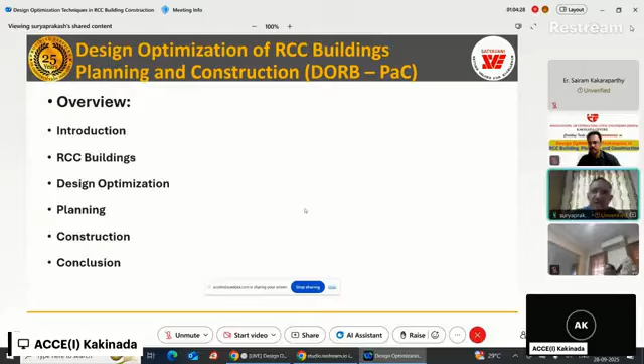Construction demand for buildings, as we all know, is growing rapidly. In Hyderabad alone, about 5 years back there were 2 lakh flats to be constructed in a year by builders; today it has grown to 5 lakh flats a year. Coming to our projects, the size has grown too - earlier a 1 lakh square feet apartment building was a very big one, about 15-20 years back. But today, 4 million, 6 million, even 20 million square feet are typical project sizes we are handling. That itself talks about construction demand for buildings.

So we, the consultants and engineers, have to brace up to meet this demand. At the same time, the demand for cost optimization is also growing because of the paucity of resources, and we have to optimize resources and introduce technology advancements to achieve timely completion.

In fact, we had to complete a project of 3 million square feet in 12 months, an 11 floor project, delivered at 180 rupees per square foot. We've delivered such projects, and I'll be sharing some of my experiences from them.

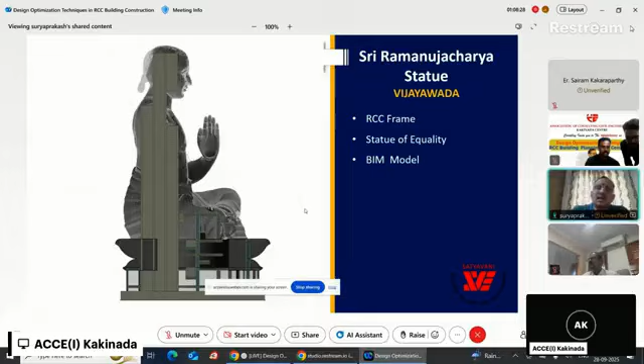This is just one of the complex projects that we have designed - Ramanujacharya's statue in Vijayawada. It's not yet constructed, but we have designed this as a concrete structure. What is available in Hyderabad now is a bronze and brass cladded statue with a steel structure. We have analyzed and designed this as a concrete structure using the BIM model.

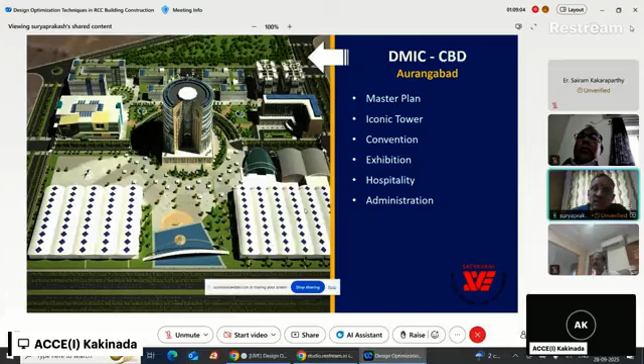I'm just showing this as an introduction to show what kind of demands we have from the clients to deliver with quality and economy. So coming on to the core of the topic, for any design to be perfect, to be optimized, investigation is the most important thing, as we all know.

And it starts with the topographic survey; it's not a geometric survey or just a survey. In many projects I come across survey drawings supplied by the client where a lot of information is missing. So we have to encourage our fellow consultants to conduct this topographic survey with all the details, including, if possible, charted utilities on the ground. And above ground also, the transmission lines or distribution lines, water supply pipelines, all the details, not only in our site but the surroundings, because it affects the design.

And when it comes to larger projects, geological survey is also very important. Particularly, we have seen the problems of earthquakes because of lack of proper geological survey or interpretation of the geological survey. Next is the geotechnical investigation. It's not a soil investigation. It is a geotechnical investigation.

We have to ask for, and we should also follow, the code guidelines for the extent of the geotechnical investigation, the number of boreholes required and the type of tests to be done on the samples. Because without this data, we will be doing the design, but after the design submissions some changes will be required from the actual site condition. So it is better we have proper investigation so that there are no changes during execution of the project.

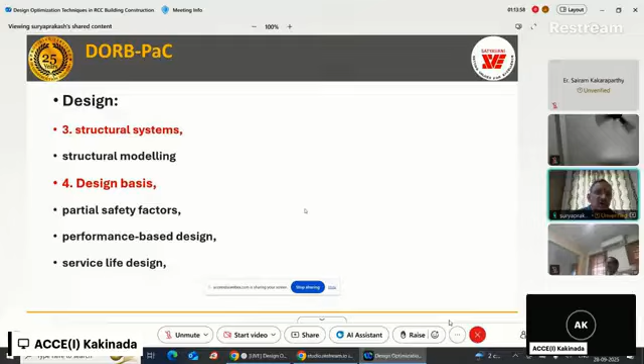Next, coming to the design, the reliability studies in view of climate change affecting loads. This is very, very important. We all know the K1 factor in our IS 875, which depends on the return period or probability of peak wind happening in the life of the structure. Now we are seeing the rainfall this year. And you must know that the rainfall intensity and the periodicity of rainfall has increased almost fivefold.

What I am saying is, in the last 100 years, 1901 to 2000, we had 5 peaks of 100-year rainfall. And in the last 25 years, we had 6 peaks of 100-year rainfall. Similarly, wind speeds we have experienced in 96 and 2000 in the coastal areas. Also, in the last 2 decades, 2 incidents of wind speeds exceeding our 100-year peaks. So this is a very, very important thing for engineers to incorporate for important structures, particularly the reliability study and proper reliability coefficient when we are designing.

And next is the temperatures rising, and the flooding happening yesterday in Hyderabad after 30 years. The central bus station CBS is flooded by the Musi flood. Of course, multiple reasons, not only the rainfall, but we have to, as engineers, take into consideration the highest flood levels of 100 years and design the buildings and facilities.

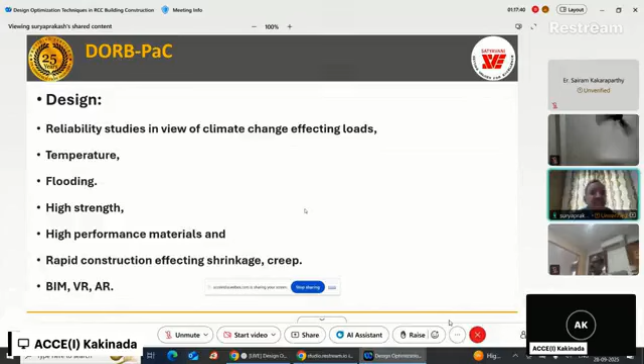It's not just the architectural plan, and we should not accept an architectural plan as it comes before we do the coordination with all the services and the structural requirements. So we as engineers have to study this interface of all the services and get the drawing finalized. Only then should we start the design. Otherwise, whatever optimum design we carry out will be subjected to revision.

Now, the core of the topic, RCC buildings we are talking about. So, what kind of RCC buildings? And when we use RCC, we have to come out of the thinking that if we go for high-rise, we must use pre-stressed or post-tension or compulsorily use these technologies. Not necessarily. If you see the Burj Khalifa design, the tallest building, it is only an RCC building. No high technology elements or materials, but definitely the best quality materials used in reinforced concrete and the most optimum structural system that was adopted.

So it's very important as consultants for us to arrive at the optimum design. Think of the total built-up area requirement, number of floors to be constructed, and whether basements are required or not. Nowadays, thanks to NBC, we are seeing basements are not necessarily to be provided unless they are economical. I propose basements only in soils where the top 10 meters is very poor soil. Then I utilize replacing the soil with the basement.

Otherwise, in a Hyderabad kind of scenario, where we have soft disintegrated rock or hard rock, we are proposing parking floors above ground only. And that will definitely be economical compared to cutting the rock, in terms of time and cost also. And next is type of structures, whether it is a residential building, commercial building, or office building. Nowadays, when we talk about the optimum spans we are adopting, from my experience, I'm sharing, the span is decided based on the number of car parks required. This is a very, very important point to be noted.

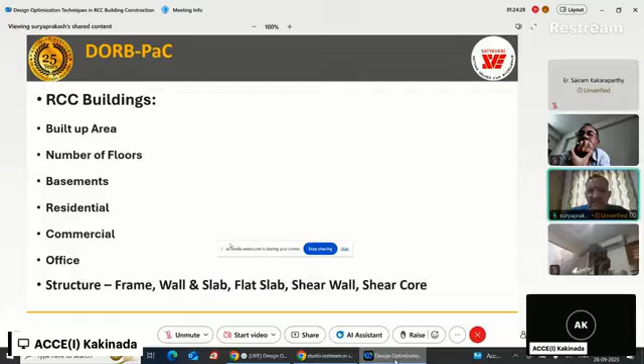And next is the flat slab. Flat slabs we use in commercial and residential buildings. I'll share some of the experience. And of course, we have shear wall. We use the term shear wall when we have the framed structure reinforced with shear walls for high-rise construction above 10 floors and up to 20 or 30 floors.

Next is the shear core. Shear core happens naturally in the planning because of the service cores like lift or staircase, where we use the shear walls combined as rigid monolithic, and it becomes a shear core, very advantageous in terms of constructability and speed of construction also. I'll show some of the pictures for that as we move forward.

Next is the planning. I already touched upon planning a little bit, but statutory requirements, bylaws, particularly in Andhra Pradesh now, a lot of amendments have taken place in the bylaws. So we have to be very thorough with those bylaws. Why I'm talking about it is most of these things come on us, because though we are the engineering consultant, the client depends on engineers, because most of the time we are connected with the project. Architects, once the approvals are in place, are not so much connected as we engineers.

So we have to be thorough, particularly about NBC provisions, fire safety norms, water supply, waste management, and not only structure actually, we have to be thorough with all these aspects when we talk about the permission. And timely completion is the most important thing. When we are planning itself, we have to consider the time of completion of the project and start considering the structural system and design methodology, considering this.

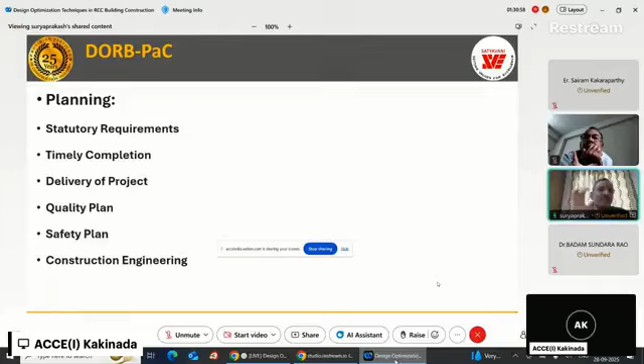I'm just sharing as a fellow consultant my experience with my clients, so that it helps you in dealing with the clients. Definitely 2 rupees per square feet or 5 rupees per square feet will not be sufficient to work as a consultant. So we should move to that.

Next is the construction. Many advancements in construction, concrete types and curing compounds. We know curing methods: we have steam curing, we have heating heads, we have curing compounds, all these methods, and block work. Earlier, we were only dealing with the clay brick, but now we have block work. We have cement blocks, hollow blocks, terracotta blocks, AAC blocks, CLC blocks, all these, and different sizes.

And I want to tell you and insist that please don't leave block work to the mason. Masonry is not mason's business; masonry also is engineer's work, actually. So we have to engineer the masonry also. I have come across brick walls collapsing, actually. So we have to take care of that and consider construction method and time while deciding the block work and size of block and weight of block.

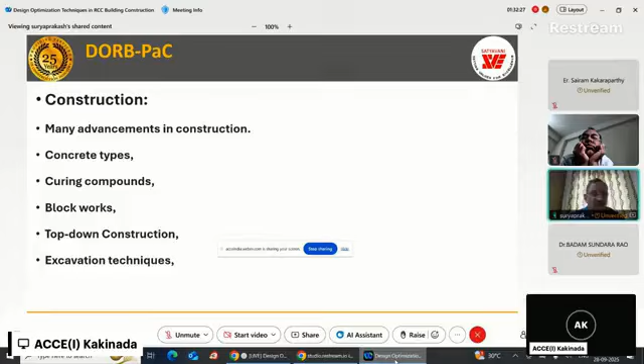Next is the method of top-down construction. Nowadays we have this. I will not go deep into that, though we have given a proposal for one of the projects including top-down construction. And excavation techniques: what method of excavation we follow in the project should be considered.

Next is the deep foundations like piling. In Andhra Pradesh particularly, we have the longest coastline, and we need to go for deep foundations, particularly piles, precast piles. We have driven piles, bored cast in situ piles, jetty piles, all this. And also we can use micro piles, particularly for retrofitting existing buildings. Micro piles will come very handy, and micro piles can be used for small projects, actually.

It is very advantageous, like 6-inch dia with a 32 dia rod, single pile, of depth about 6 meters, 7 meters for a small building. We need not necessarily go for under-reamed piles, and we have done strip foundations on under-reamed piles in AP in clay soils. So that is another optimum design we have done.

And 2D and 3D precast construction is also gaining ground. In fact, I worked out the feasibility of 3D modular in East Godavari, because I'm talking to Kakinada engineers. We have even worked out on that. And rigid monolithic construction, that is Mivan or shear wall, which is popularly known, and post tensioning and monostrand.

Monostrand we have already used in one of the residential projects where the builder wanted 6 meter by 8 meter as a single flat without beams, without columns in between, to improve the speed of construction. In fact, post tensioning is not economical for a 6 meter span, but for speedier construction, lesser cost and lesser slab thickness, we had to go for post tensioning. But for the first time we used monostrand and brought down the slab thickness to 150.

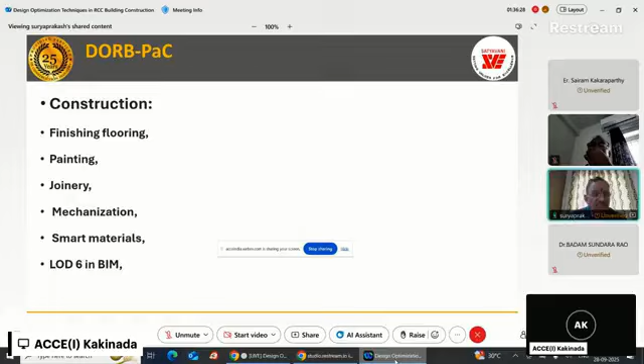In fact, in 2007 I talked about this, that the future will be mechanization in construction, and now we are experiencing no project without mechanization in material handling, material transportation, labor transportation, or even the total execution of the project. So LOD 6 in BIM will help us in planning the construction. Next is the building facade, plumbing, building automation, electrical, water supply.

I will not go in detail, but we have to consider all these aspects when we talk about optimum design of the structures, whether it is loading aspects or clearances, ducts, requirement of ducts particularly for fire, and nowadays for waste also, garbage chutes and all that. So water supply ducts, electrical ducts, building automation, everything we have to consider.

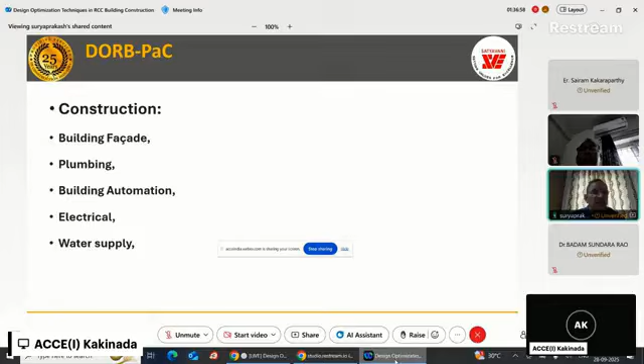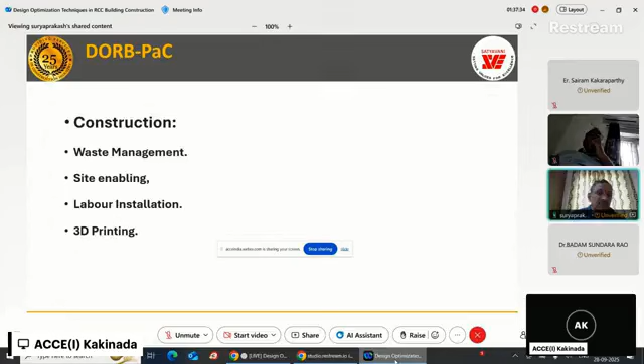Next is waste management, as I said, site enabling. Nowadays our planning we are modifying for facilitating construction also. This is very important because construction cost is a major thing, and if we don't make the movement of material efficient, then the cost will go up. And labor installation, what we call labor accommodation, and now the latest technology of 3D printing - we have to think of this for optimum design, planning and construction in future.

This is BIM 7D. I was talking about LOD 6 for construction, and now 7 is for facility management. That is post-occupancy future. It is going to be necessary for us.

Thank you. So structural system should be finalized through study of plan, drawing and construction system. For the interest of our friends, I did one project with BTech students in Hyderabad - what is the optimum span in an RCC building frame of stilt plus 5 floors? This is the question, and we did the real study, parametric study, of the column beam slab system.

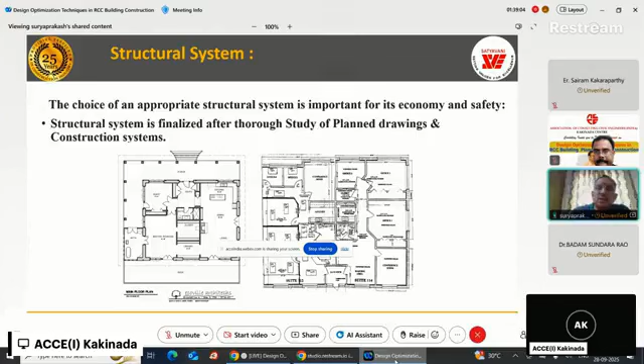And we found that 3.6 meter is the optimum span - 3.6 by 4, 3.6 by 5 can be optimum. So we have to see that we bring down the span to 3.6 by considering the plan and propose the framing to the planners, whoever is planning. So the framing system that we select should be suited to the building plan, and the selection of structural system is to be finalized with respect to cost, time, buildability, and functionality of the structure.

I'm only telling what I have implemented. I'm not telling theory actually. I'll explain.

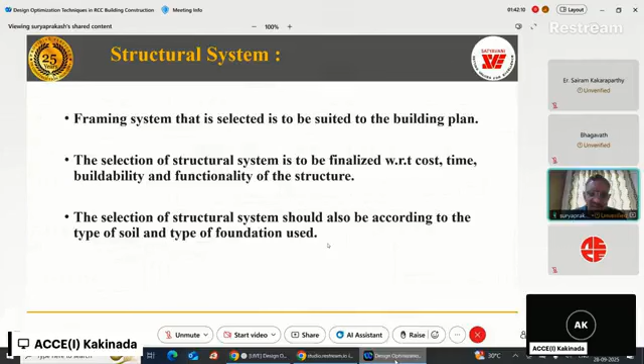Okay, thank you. So the selection of structural system should also be according to the type of soil and type of foundation used. Because as I said, the foundation, whether it is pile foundation or raft foundation or the piled raft or even the annular raft or strip footings, all will determine our structural system also, overall cost when we consider. Next is load bearing and ribbed floor, RCC slab, column slab beam, framed diaphragms, and then column plate or flat slab system plate.

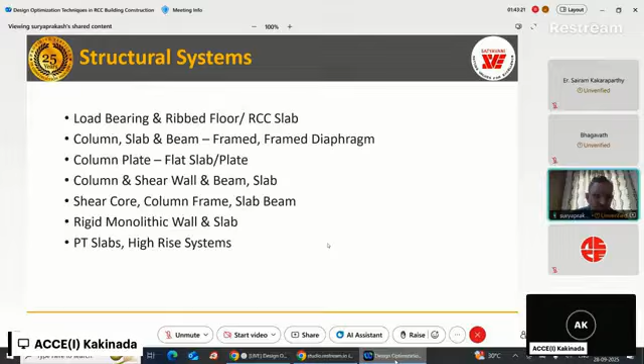So load bearing is a simple thing. This is a load bearing infilled frame, I would say, which is good for seismic resistance also. And this is just a wall and slab, load bearing wall and slab system, which is still good actually, which is still economical, except for time and quality and availability of materials.

IS 1905 is the masonry code. There are two codes for masonry. We have to use these codes, and of course these codes require revision. So let's not forget that masonry wall also requires proper design, structural stability for the masonry wall also.

A flat plate floor system - in fact, I have done a project in UK where the floor height is 2.7 meters.

Because of the heating requirement, if you reduce the volume, it is really very economical. So how can you bring down the floor height to 2.7? There, strictly adopt flat plate only, no beams at all, no structural wall, only column and flat plate. Of course, it is possible in Britain, UK, because the earthquake is not very critical. In our country, earthquake is critical, so we have to be careful when adopting this.

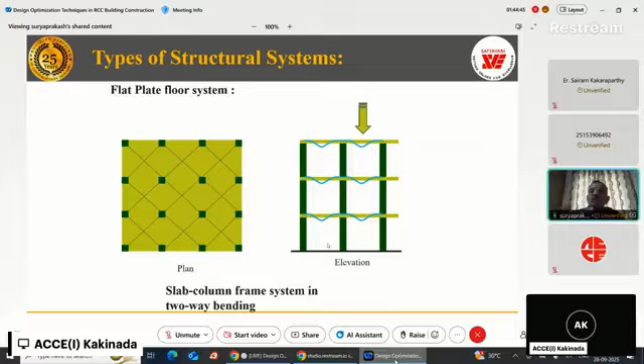Next is simple construction, flat ceiling, reduced finishing cost, and low story heights due to shallow floors. I have seen in Europe some slabs without plastering, without false ceiling also, in a hotel. He has used formwork, this plywood, which has given the finish as a texture actually. So that's really very good. We should adopt that kind of innovative things so that we can reduce the cost, improve the aesthetics, and also improve the performance.

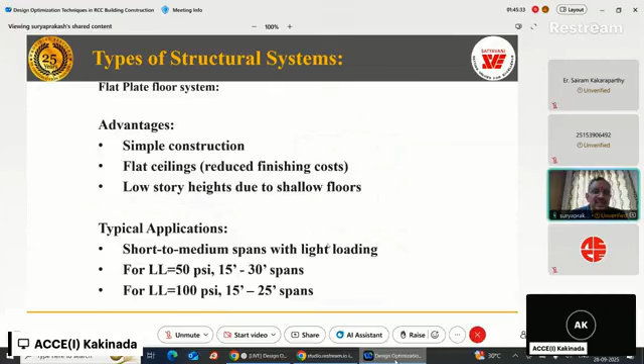So low story heights due to shallow floors, and short to medium spans with light loading. We can use this flat plate, as I said, and also lack of earthquake. Flat plate with spandrel beam, that means outer we have the beam so that we can reduce the thickness, because we all know flat plate critical is punching shear, and punching shear will be critical in the edges because there is only 3 sides or 2 sides for resistance. So this spandrel will help in reducing wherever possible.

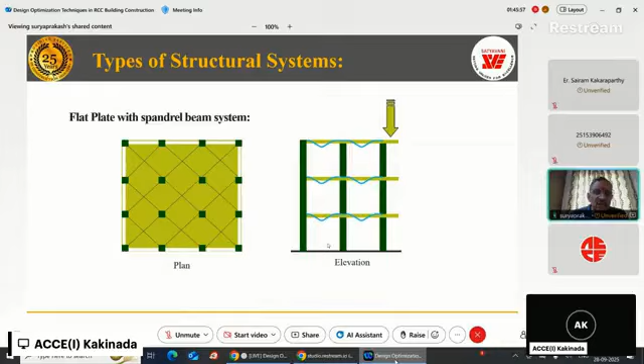Next is the flat plate with spandrel beam: increased gravity and lateral loads, increased torsional resistance - that is very, very important - and decreased slab thickness, as I mentioned. Same as flat plate systems, but shuttering for edge beams has to be taken care of.

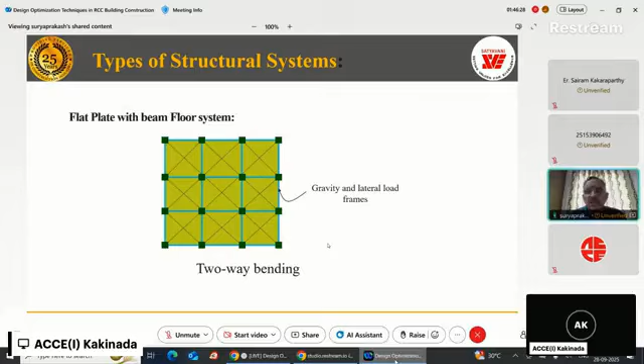Next is the flat plate with the beam floor slab system. That means we have a larger span, we use only flat slab, but we have the beams connecting the columns, and the gravity and lateral load frame will help. And two-way bending, increased gravity, and simple construction, flat ceiling.

Next is the flat slab, which we all know very well as per IS 456. We have the drop panel, we have the column capital or column heads actually. So this will help in reducing the thickness, the drop panel. Again, as I said, when we go for 11-meter grids, this will help a lot. Flat slab system we found as most optimum.

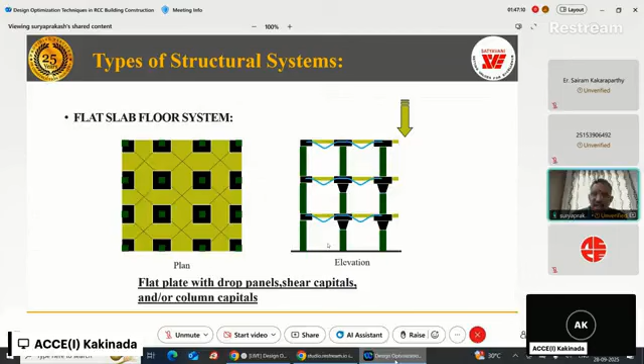And for construction cycle time also, we have used the drop head shuttering system and table form. I'll show that as we move forward into the construction thing. Flat slab floor system, normally we have designed for 8-meter span with 180 mm slab thickness actually, with the post tensioning. Very economical. We have done with 4 kg per square feet steel consumption with 180 mm flat slab.

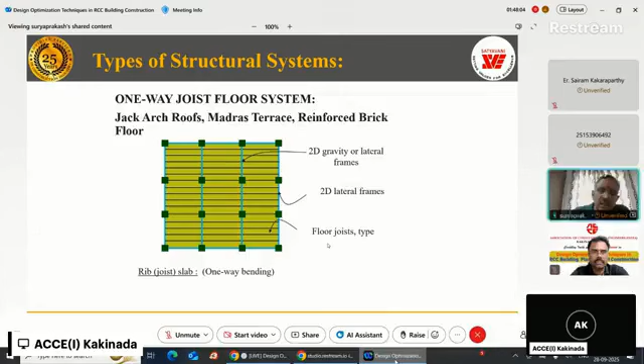Next is the one-way joist floor system. This we use where one span is larger and the other span less, depending on the requirement of the client. Suppose you need 14-meter span instead of 11, and the other span they allow us 6 meters, then go for this kind of joist. In parking floors, it will help a lot. We have beautiful one-way joist - means one-way joist is not steel or wooden, it will be concrete only. We design the joist as a concrete ribbed floor actually. One-way joist floor system, and then we use it.

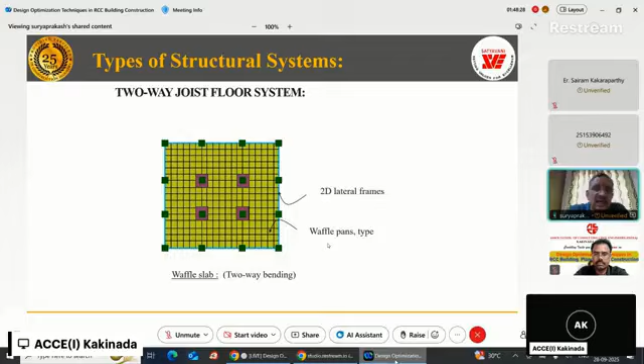Next is the two-way joist floor system, that is like a waffle. We all know when the spans are much larger, beyond 11 meters - up to 11 meters you can have flat slab with the drop panel and column capital - but when the span increases to 15 meters or 18 meters kind of thing, this waffle system will help a lot for the 15 by 15 kind of span. So we have used this also. This is the waffle system.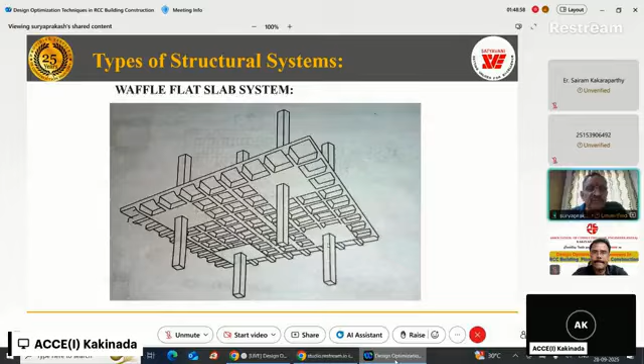And nowadays we are using plastic balls actually also instead of waffle. That is more economical, that is a biaxial slab system. Chiranjeev Rao, our friend, has been promoting that technology and it is very useful. So these are the solid slab with beams, waffle slab with the two-way thing, and waffle slab with integral beam and ribbed. These are all the different systems that we can use for optimum design.

And the rigid framed structural systems, this we can use, and this also, of course, you are all very experienced, but many people - I had doubt when I was doing my masters - how to model the foundation, whether fixed or hinged or partially fixed in our 3D model analysis.

My guide, Professor Arvindan, told me this, and I follow it every time: hinged means allow rotation. So in which type of soil do we have rotation in the footing? Sandy soils or silty sand kind of soils will have rotation, so there we have to model it as hinged. But when we go for a foundation like raft, pile foundation, or piled raft, we have to treat it as fixed, even though the soil is poor. This is just for clarity, and if I'm not wrong, some of you may correct me—I can learn also.

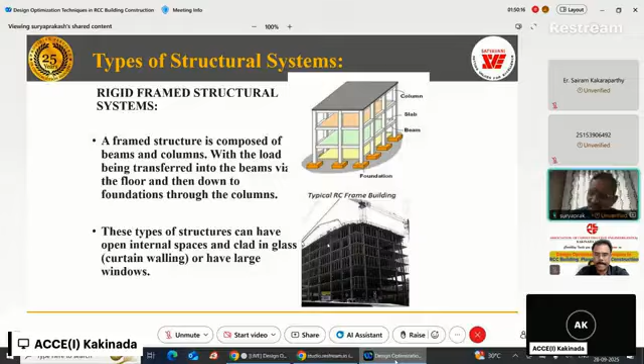This is the shear wall framed system where we have floors more than 10. In fact, in Gujarat post-earthquake, I visited and saw at least 100 buildings in distress, and of course collapsed buildings we don't bother about, they collapsed anyway. I found that most of the buildings with shear walls were saved, though they were not designed properly for earthquake. So this is my experience.

Shear wall helps a lot in lateral load resistance, whether it is seismic or wind. In number of floors more than 15, or even more than 10, wind will become critical, more than earthquake actually. So we have to be very careful and design for both wind and earthquake in all projects, particularly in Andhra Pradesh. Coastal districts, many districts fall in zone 3, so we have to be very careful.

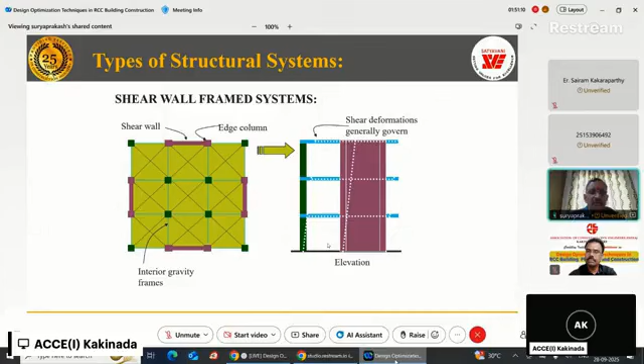This is actually, I was proposing this kind of solution for Indiramma houses and Jagan housing earlier. But the politicians or administrators don't like technological solutions because there is nothing to play around. So now that is happening.

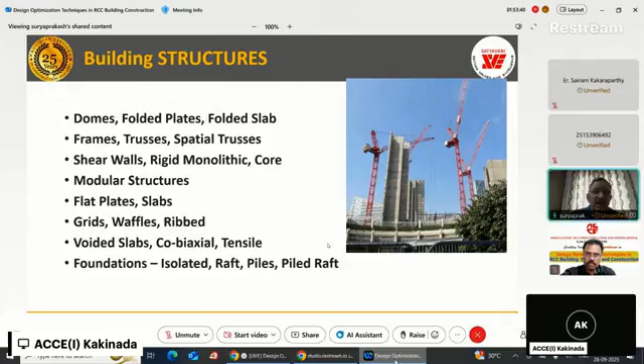So this is about building structures and the construction methods: conventional formwork, ACROS spans, and adjustable prop support, APS units. Doka, drop head, table form, tunnel form—I'll show these things which we have used. Actually we have used all this in some of our projects, and now we have aluminum formwork, engineered aluminum formwork. Even for normal construction, now we are using engineered aluminum formwork.

Large panel, Peri, Skydeck forms, and slip form, jump form, climbing form, precast concrete panel, battery mold, modular, and double T's, single T's, and hollow core slabs. And then Upcrete—I'll show the pictures of Upcrete, light wall panels, ACOTECH. Now the partition walls, we are not at all going for conventional ones; the Bombay project we are doing, we are using ACOTECH only panels. And in Hyderabad also we have Robomatic, which is a light wall partition wall, 75 mm thick also with hollow core.

And piling, pile driving, shore—we are doing pile driving, precast piles. In Vijayawada, I'm doing one project where we are using precast piles. In Kakinada also, Reliance has used this precast pile driving.

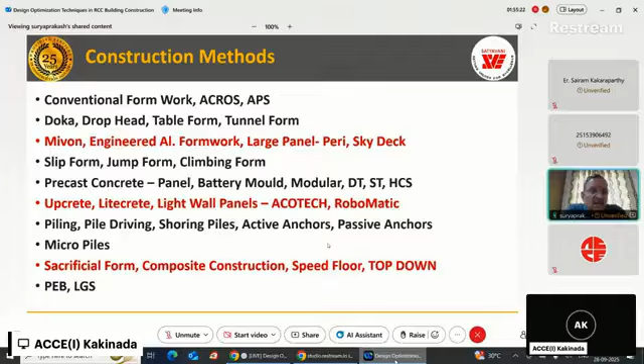And in Ongole, we have done one mall with these precast piles. Shoring piles, active anchors, passive anchors. This is for slope stabilization actually. Micro piles, sacrificial form, composite construction; speed floor is one of the types of systems for construction for large spans. Top-down construction and PEB, LGS, of course, today we are not talking about.

Next is the buildability assessment. Now we have come to the core, optimization. We have talked about structure and design, we talked about planning, we talked about construction. Now with all this mixed, how do we assess which method to be used for a given solution? Where do we optimize? What is that optimization? So that is buildability, cycle time for each floor, working capital, capital expenditure, mechanization, capital expenditure of construction actually.

That means investing in formwork, investing in a batching plant; all these things we consider when we are deciding the construction method. And next is mechanization, material handling, feasibility, labor availability. This is the biggest thing. Here I must tell you about my favorite project again, the affordable housing in 12 months. For that project of 3 million square feet to be completed in 12 months, I assessed the labor requirement at 4,000 people to be housed near the site.

And a 4,000-person labor camp requires 30 acres of land. Imagine leasing 30 acres of land in Hyderabad city for a labor camp for 12 months; it is a big challenge. So by using these three technologies in the same project, we reduced the labor requirement to 2,000. When I say labor requirement, it is carpenters, fitters, helpers, plumbers, electricians, masons, everyone. Total labor requirement. We brought it down to 2,000 by using precast and rigid monolithic in combination with conventional. And the labor camp land requirement came down to 15 acres.

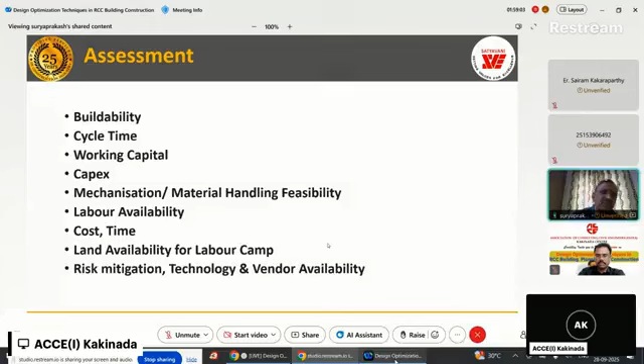Risk mitigation means, as we have seen in Andhra Pradesh, suddenly the government wanted to build 4.5 lakh houses within 1 year, all with aluminum formwork. Imagine who will supply so much aluminum formwork if you are doing everything in aluminum formwork. So that's a risk. The cost of aluminum formwork went up during that time. Whereas I could procure aluminum formwork at 9,000 rupees per square meter, the contractors procured it at 14,000 rupees per square meter. So that kind of thing.

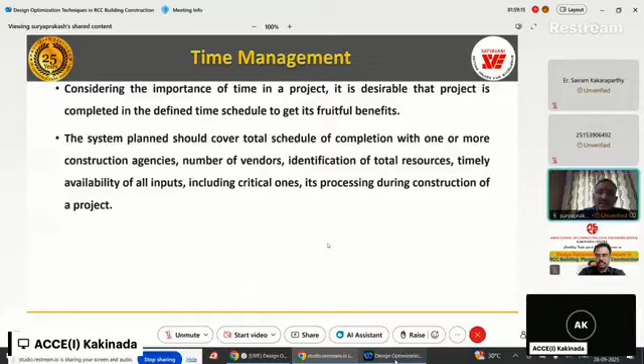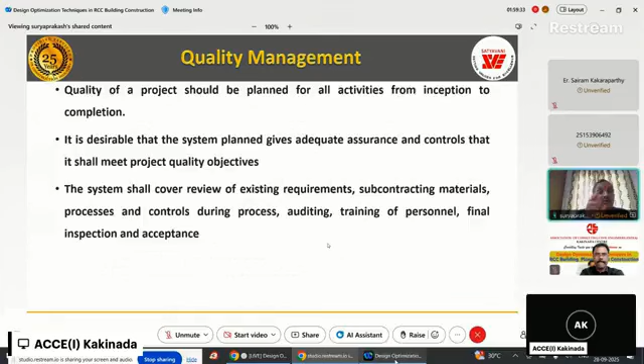Next is time management, the importance of time in a project. Cost is related to time; it is directly proportional. It will increase with time. So we have to think of an optimum timeline, and then quality. But quality doesn't cost, my Guru Garu once said. Does quality really cost? No, quality is a necessity. We cannot talk about optimization in quality, but quality management, with what systems we can achieve quality, is very important.

Next, risk in construction management. Labor supply: in most projects, in the Indian scenario particularly, every season some labor goes on holiday, like for Dasara, the north and east, west workers, and Maharashtra and other people. So this supply risk is a very big thing. Structural steel supply and erection, and high-rise management experience are very, very important. Now suddenly there is huge demand for high-rise buildings, but not many people are available. Purchasing, management staffing; I am struggling to get management staff, engineers who can manage the project.

Next is construction planning for high-rise buildings. I think we are running out of time.

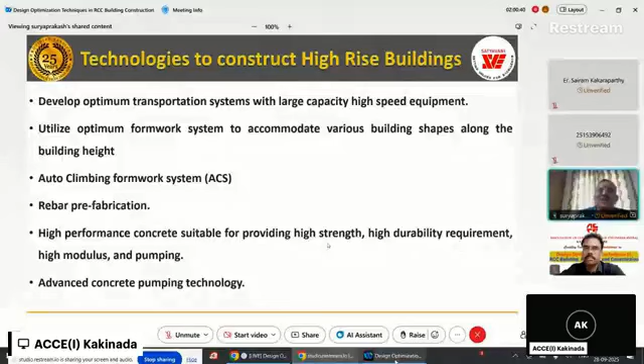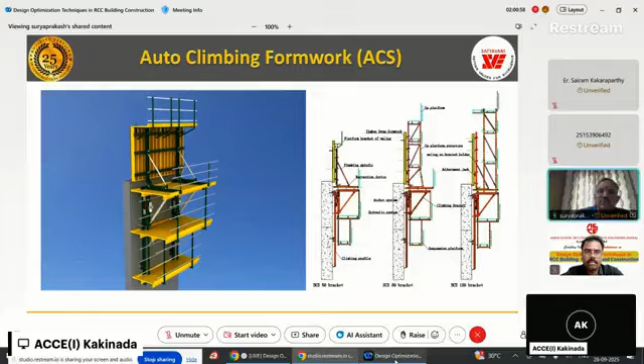I'll try to move quickly. Technologies to construct high-rise buildings, and then technologies for column and wall, and various methods of construction. With pictures we'll be able to do better. Auto climbing formwork, which I'm showing in the picture, and safety platforms and walkways are also important when we talk about formwork. Rebar prefabrication is very much available in Hyderabad, and now it is time we plan for this everywhere, in every district of Andhra Pradesh also.

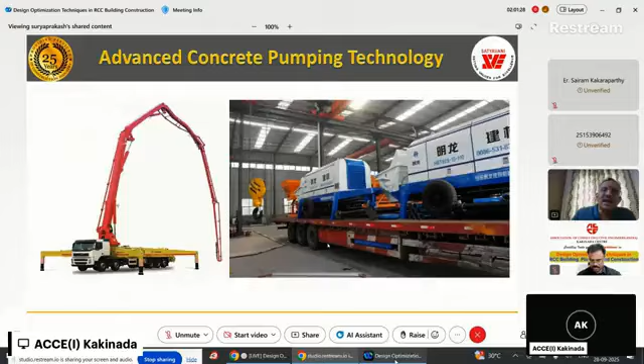Next is rebar prefabrication. This is for piles, particularly in columns. Then concrete pumping technologies, because when we talk about high-rise buildings, concrete pumping and boom placers are very important. And simple drop head formwork. This we used about 20, 24 years back. The first time we used drop form was to reduce the deshuttering time by at least 7 days.

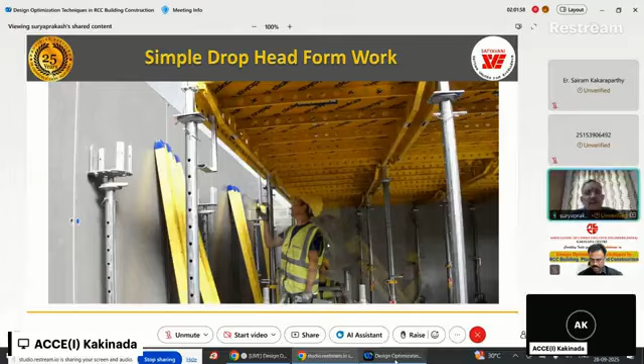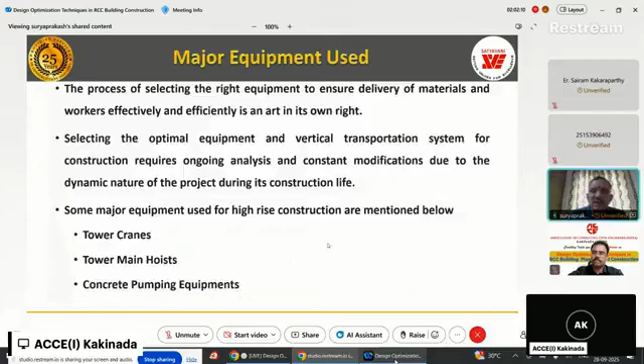Our friend Rambabu is supplying CMAC, very innovative material handling systems. Precast flat panel systems, like large panels in precast, we have used in the project. 3D volumetric construction also. Next, tunnel form: in Hyderabad and Bangalore they have done tunnel form. The cycle time is 3 days. If my cycle time is 7 or 6 days, with tunnel form 3 days is achievable, but safety we have to take care of.

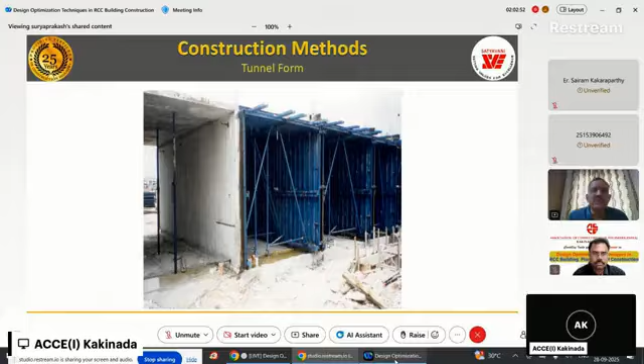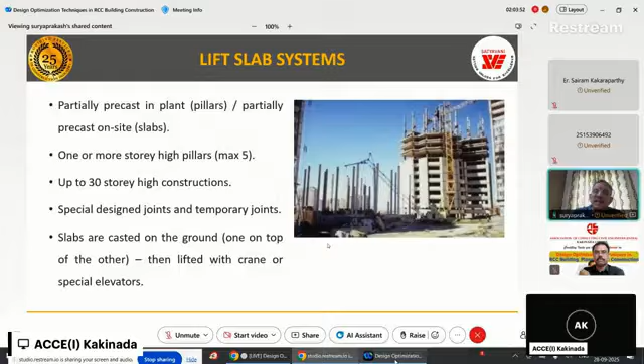Pre-stressed concrete, of course, walls, precast columns, solid slab panels, and lift slab system. This is another for faster construction: the slabs are cast, and without centering you can lift the slab onto the columns. And slip form construction. Table form we have used in Pune in one of the office buildings. We did 2 lakh square feet in 3 months, the structure with a cycle time of 4 days using this table form.

System column formwork: you can see these inclined columns and this type of column. Vertical panel systems: DOKA is very good for retaining walls and high wall systems. Next is Upcrete. This is what I wanted to share with you. I don't know how many of you have experienced, when we do the wall and slab system, air pockets in the vertical walls. Even in precast we get that kind of air pockets. The reason is, when we pour the concrete from the top, the air is entrapped in the concrete. That air has to escape and it doesn't find a place, so you get air pockets.

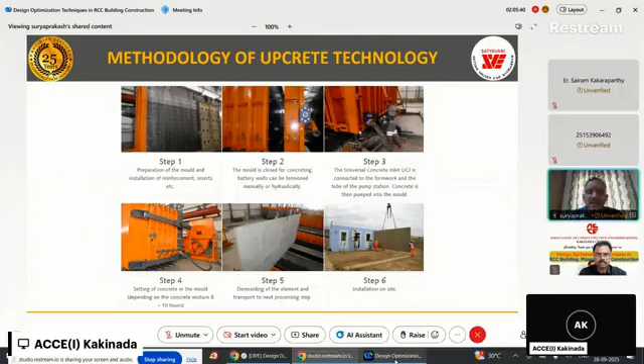So this Upcrete system was developed. That means you pump the concrete from the bottom up. You can see the pipe here, step 3. The pipe is connected here and concrete is pumped up so the air escapes from the top. This is not very new; it's 15 years old. I'm trying to implement it, but its cost is very high; formwork cost goes up. But wherever you need the best quality, you can use Upcrete technology. We use Upcrete in 3D modular precast also, the battery system.

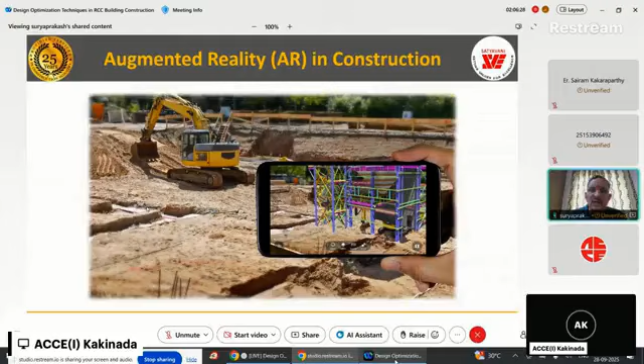And augmented reality, it will save us a lot of time in site visits if we can implement in the project. Recyclable unique formwork. This is the invention recently, 3 years back, presented in FIB Congress by Germans actually. That means the formwork used for this is sand with a chemical compound. And normally this kind of complex structures we don't plan because of the formwork cost. Here they found that they optimized the structure shape for the most economical thing, and they use the recyclable form.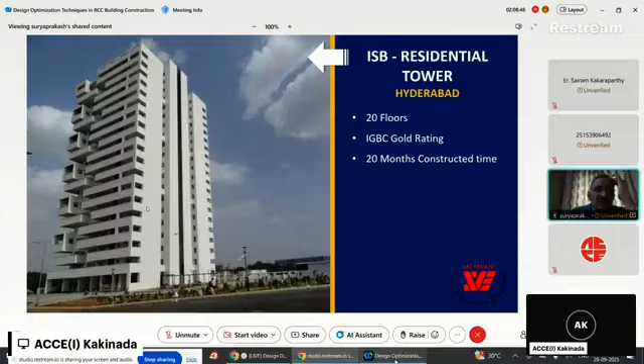ISB 20 floors completed in 20 months with the IGBC gold rating. We did this project also, construction, and phase 3 we completed DPR, and now construction is going on. And here the consumption of steel for 15-story rigid monolithic construction is 3 kg per square feet. Very economical optimum system.

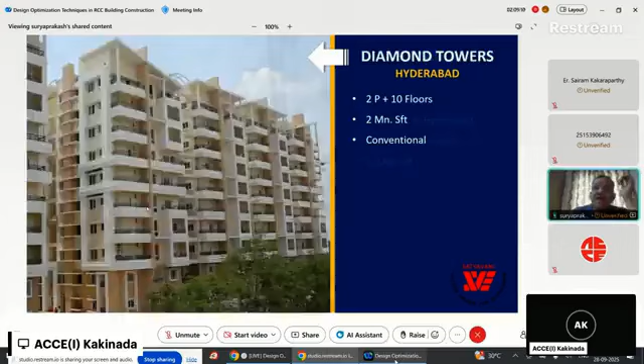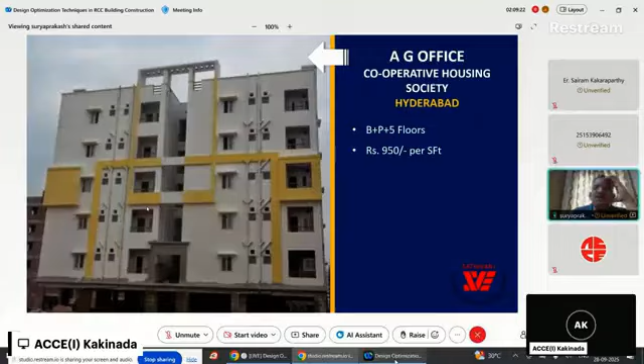And this is another project, not very optimum. This is also a conventional project, 2 million square feet. Here we have used rigid monolithic construction first time in Hyderabad in 2006. This also rigid, first PT monostrand. And 950 rupees per square feet we did about 10 years back, of course. And this is the high-end villas in 13 acres, 36 villas we are doing.

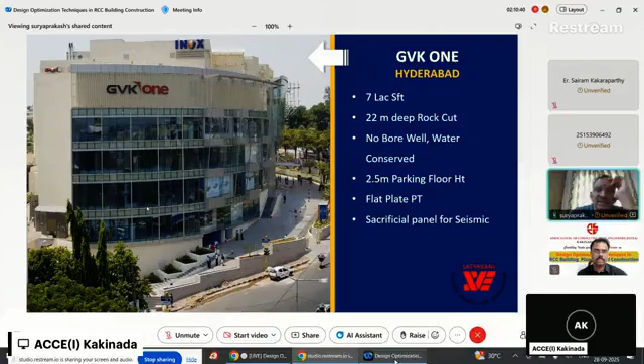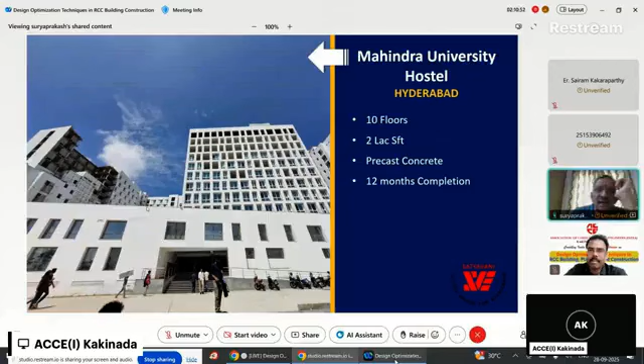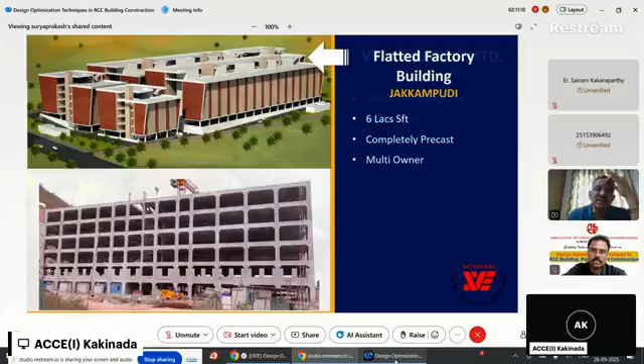Of course, this is the flat slab system and pharma industries in RCC building. This is a commercial building, BMW showroom, and all simple buildings. Snow World also in the same project we did RCC, post tensioning and composite deck. First time slab without reinforcement. We have used the polypropylene fiber and deck sheet on the roof actually. There is no reinforcement.

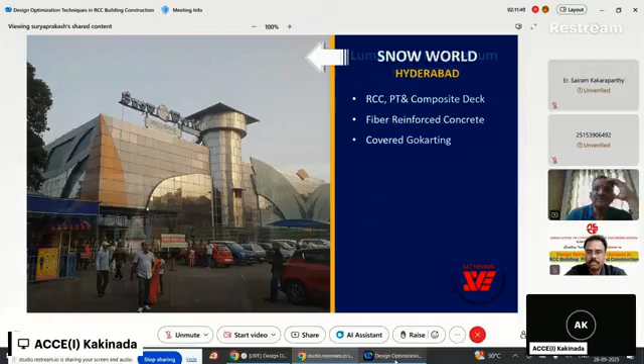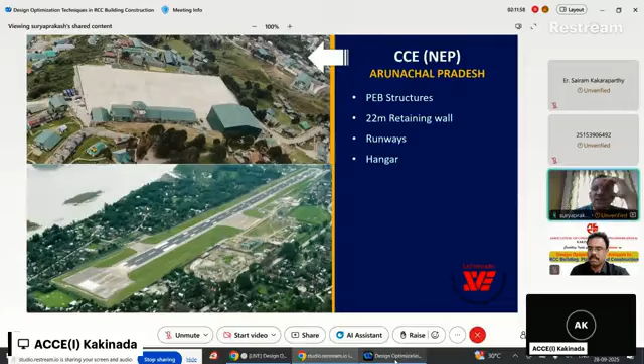So finally, I'll conclude. India is leading in terms of volume of construction and also implementation of technologies, latest technologies actually. This is very heartening to note. We engineers in India are delivering the latest technology projects. Professionals, researchers and academicians need to be updated on the trends and upskill all the stakeholders.

This is my aim and this is the reason why I accept anybody asking me to give a talk, because I have some international conference exposure and I am also in committees of our codal revisions that are happening, including NBC, and codes and standards must be updated to formalize the practices. Whatever I talked, most of them are not in the code. Actually, I have come across IIT professors asking me to show the code for why I am using a ribbed floor like that.

So we have to come out with manuals of practice so that they become the code of practice as we move forward, and ratify the methods being adopted by the industry. So this is a very, very important thing. So we have to work for it as engineers. So I look forward to all your support for achieving these objectives.